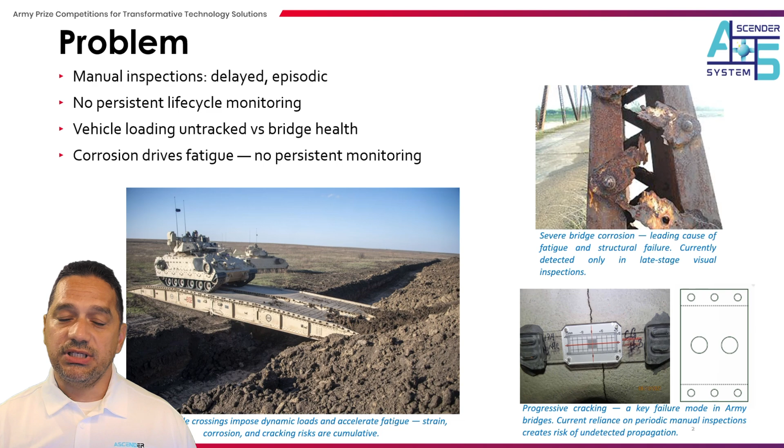Today's Army bridge health monitoring faces a significant gap. First, manual inspections are delayed, episodic, and unable to support real-time decisions. Next, there is no persistent lifecycle monitoring, especially during storage or post-damage conditions. Third, vehicle loads are not tracked or correlated with bridge health, making fatigue and readiness assessments unreliable. And finally, corrosion, a leading cause of degradation, lacks automated continuous sensing, increasing risks to our mobility forces.

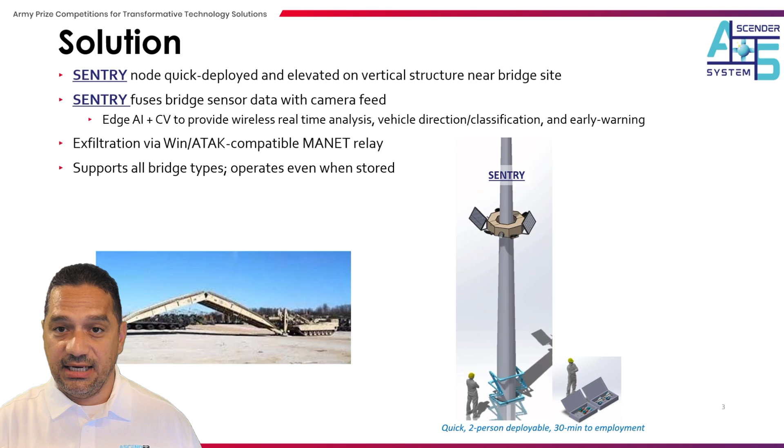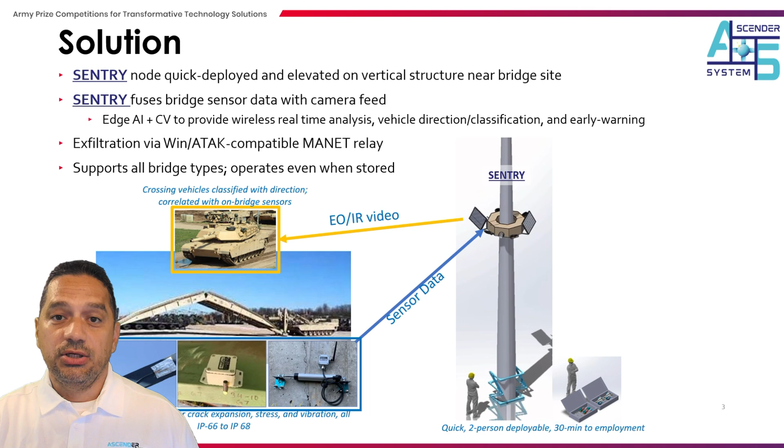Once fully deployed, the SENTRY node acts as an intelligence hub, receiving wireless data from the bridge below. And it fuses and correlates that data with the electro-optical and infrared imagery and vehicle direction and tracking. The system performs real-time AI data processing. It then stores the data locally on its SQL server, or it exfiltrates via a secure tactical scalable MANET.

On-bridge sensors, as shown in blue, shall capture strain, displacement, acceleration, and vibration and wirelessly transmit their data through a centralized gateway hub to our off-bridge SENTRY node, shown in green. EOIR sensors on the node also perform vehicle classification, direction tracking, and corrosion monitoring. All of this data is processed on board and stored locally. It is then exfilled securely via tactical C2 systems with full WinTAK, ATAK integration.

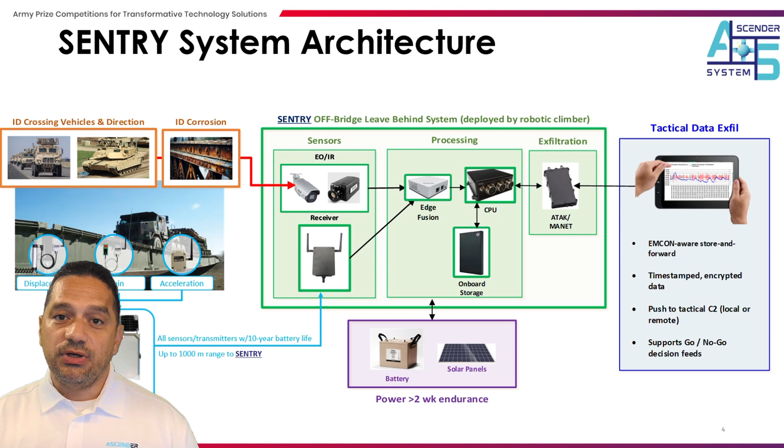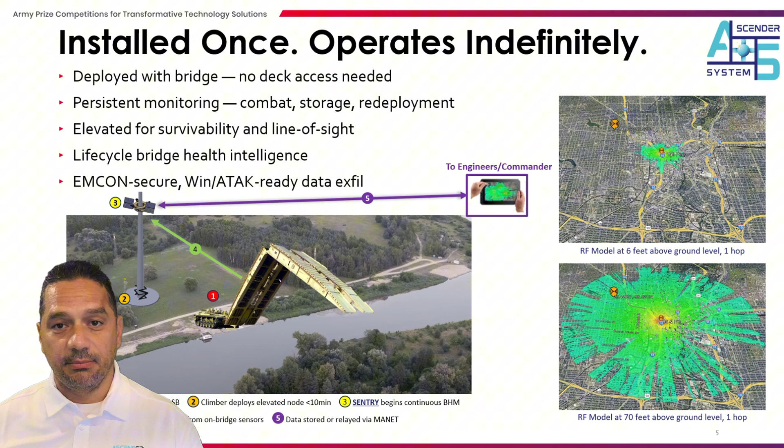SENTRY is deployed once during bridge emplacement with no need for repeated deck access. Its elevated position improves survivability and, as shown on the right, greatly extends the RF line of sight to over 7 miles on a single hop. This enables longer range connectivity to the battlefield commanders, and it also enables continuous monitoring even during extended operations in a denied environment. The system is built for tactical integration, giving engineers and commanders real-time lifecycle intelligence without adding operational burden.

SENTRY outperforms both legacy tools and many emerging solutions in key mission areas. It is the only system that separates remote sensing from the deck, enhancing survivability and rapid deployment. For example, in the event of an IED attack, SENTRY would continue monitoring events and providing threat assessments to the commander. It fuses strain, vibration, and visual data in real time, delivering a full operational picture, and it is fully secure and WinTAK/ATAK compatible, built for Army tactical use.

Across our competitors, most solutions remain deck-mounted, episodic, or lack tactical integration. SENTRY stands out as the only elevated, persistent edge AI solution that specifically does not require any human interaction once installed, making it designed from the start to meet the Army's operational intent.

SENTRY supports multiple bridges across their full life cycle. It provides go-no-go intelligence even in denied environments, supporting critical mobility decisions. It replaces manual PCMS and crack coupons with persistent automated data, and it enables readiness-based sustainment, reducing risk and avoiding unnecessary replacements. In Phase 1, pre-mission, SENTRY deploys with the bridging team.

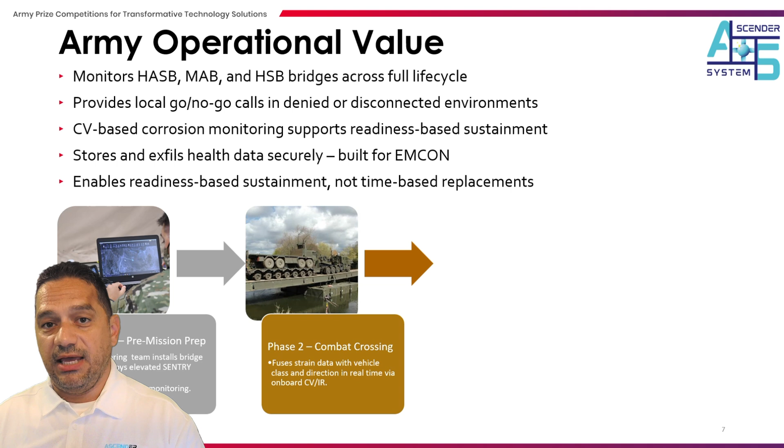Phase 2, combat crossing, it fuses strain and vehicle data in real time. Phase 3, storage mode. It continues monitoring during storage or staging, detecting degradation early using a compact 120-volt AC SENTRY mini module maintained in the warehouse. And finally, for post-blast, it enables rapid damage assessment and clearance calls.

Our system is built on validated components with a clear path to Army fielding. The robotic climber and SENTRY node are patented and field tested on multiple vertical structures. On-bridge sensing leverages Resensys's strain and vibration sensors, proven in Department of Transportation and DoD projects. The node integrates Trellisware tactical scalable MANET radio and EOIR sensors in real-time edge fusion and with WinTAK/ATAK compatibility. All components are MIL standard compliant or field hardened, designed for our austere Army environment. This is a TRL 6 plus architecture, ready for Phase 2 validation.

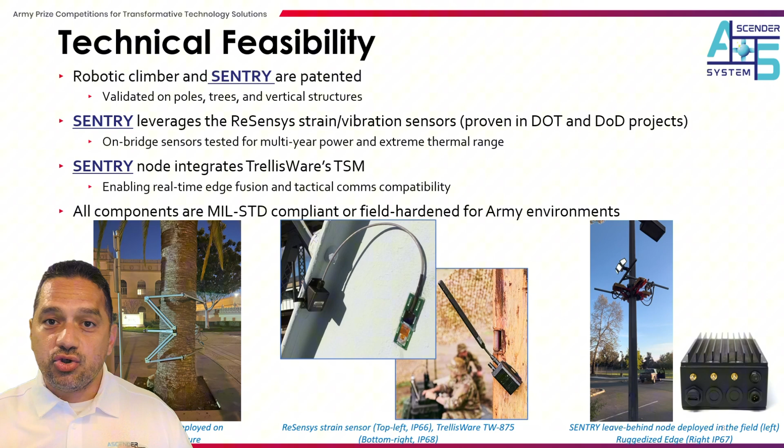We've conducted structured risk assessments grounded in Army operational reality. Key risks include sensor degradation, exfil disruption, and deployment errors. We mitigate sensor risk through fault detection and replaceable sensor heads. Exfil disruption is mitigated through store and forward buffering and burst-based relay, supporting low signature operations as well as alternate waveform use. Deployment risks, including failed climber attachment, are addressed through quality assurance processes and installation checklists.

On the opportunity side, we are leveraging proven sensor and commercial off-the-shelf component systems, thereby reducing integration time. We propose accessing SENTRY SQL data via standard ATAK/WinTAK plugins, thus supporting immediate Army ConOps use. And if off-bridge deployment is adopted as an Army standard, it directly reduces lifecycle and sustainment cost. Bottom line, this is a low-risk, high-reward architecture aligned to the Army's transition needs.

Our Army transition pathway is designed to move SENTRY from a validated architecture to a fielded Army capability. In Phase 1, shown in blue, we're proposing to target transition through PdM Bridging, Mr. Chris Upton, with strong engagement from GVSC and the Bridge Tech Lab. By mid-Phase 2, shown in yellow, we'll execute our demo at Fort Leonard Wood or Proving Grounds, supporting bridging modernization

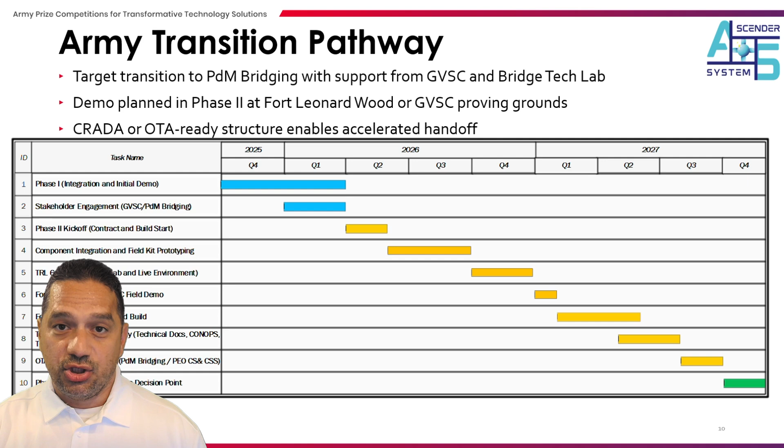goals. Because our system is built on modern open system architecture principles, we can ensure program of record compatibility, thereby supporting rapid acquisition. We're structured for cooperative R&D agreements or OTA transition, enabling accelerated Army handoff at Phase 2 conclusion. As shown here, we have a clear and executable transition plan, moving from TRL validation, stakeholder engagement, and an Army fielding pathway.

Dual use and commercial applications. Beyond the Army bridging operations, SENTRY applies to critical civilian and interagency missions. It was designed first for combat bridge monitoring, but it can be readily adapted for Department of Transportation bridge inspection, FEMA post-disaster, and utility infrastructure protection. The same AI ruggedization and secure wireless backbone supports scalable applications across all sectors. And more importantly, dual use helps reduce Army lifecycle costs, delivering value back to the Army.

We've built meaningful traction, de-risking Army transition and supporting Phase 1 and Phase 2 execution. We have legitimate traction across technical development, commercial engagements, and multi-use defense opportunities. Technically, both the Robotic Climber and the SENTRY nodes have capabilities and potentials that have been successfully demonstrated. Strategically, we're progressing through both xTechIgnite and xTechOverwatch, while actively engaging with FEMA, Sector 9, local Department of Transportation, and state agencies on targeted use cases.

Commercially, we have active demand from Department of Energy, FEMA, San Diego Gas and Electric, and others to help reduce Army transition costs. Finally, we've secured over $250,000 in non-dilutive funding across federal, state, and private sources to include organizations such as the California Office of the Small Business Advocate, Veterans Business Battle, and the Semper Fi and America's Fund, all of which have been used to directly support Climber and SENTRY development. This demonstrates both early market validation and financial maturity.

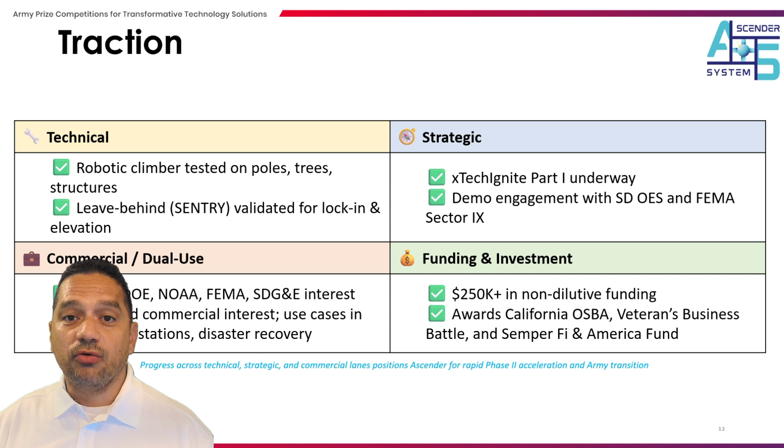Our roadmap moves SENTRY from a validated architecture to a fielded Army capability. Our primary path is through defense and government transition, but by late '26, early '27, we'll have executed our Phase 2 field demo with GVSC and Fort Leonard Wood, have engaged with PdM Bridging, and will be targeting TRL 7 or 8 validation and dual-use transition opportunities.

Simultaneously to our efforts supporting bridge health monitoring, Ascender Systems will also seek to leverage the Robotic Climber for elevated installation of both a passive drone detection capability and an automated multimodal sensor suite. Meanwhile, we have also been pursuing targeted FEMA and Department of Homeland Security opportunities for post-disaster bridge triage and infrastructure recovery. Parallel B2B and B2C pathways help support cost sharing and dual use scaling, further reducing Army lifecycle costs.

We've built a focused team with the capabilities required to deliver both Phase 1 and Phase 2 Army transitions. I lead Ascender Systems as founder, CEO, and systems architect with over 25 years in military aviation, robotics, sensing platforms, and 10 years in government contracting. I've led the development of advanced sensing systems and ruggedized ISR for the Army and joint operational environments.

Dr. Molchanov, our RF and EO communication systems architect, brings over 2 decades of experience in low radar cross-section detection, multimodal sensing, and ruggedized photonics design, with direct contributions to Navy, Air Force and Army programs. Irina, our AI, ML, and computer vision lead, is an expert in EO/IR fusion, anomaly detection, and neuromorphic edge processing, and enables SENTRY to intelligently correlate vehicle type, bridge fatigue sensors, and corrosion projection.